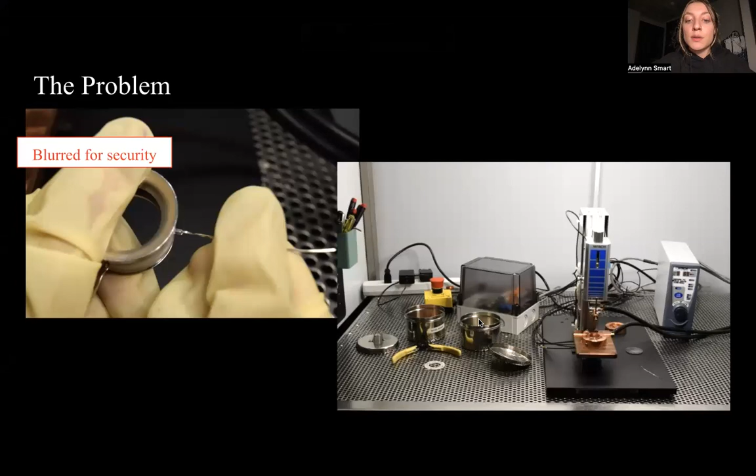Operators working on the body component of these tubes are currently required to use a type of pen to make spot welds. The exterior of the body includes 3 metal tabs where the welds take place. Both the tabs and the nickel ribbons that are welded to the tabs are only a few millimeters thick, as shown here. Using the current weld apparatus, operators must make up to 9 welds per body, leading to excessive ergonomic strain as they perform the precise, repetitive hand motions.

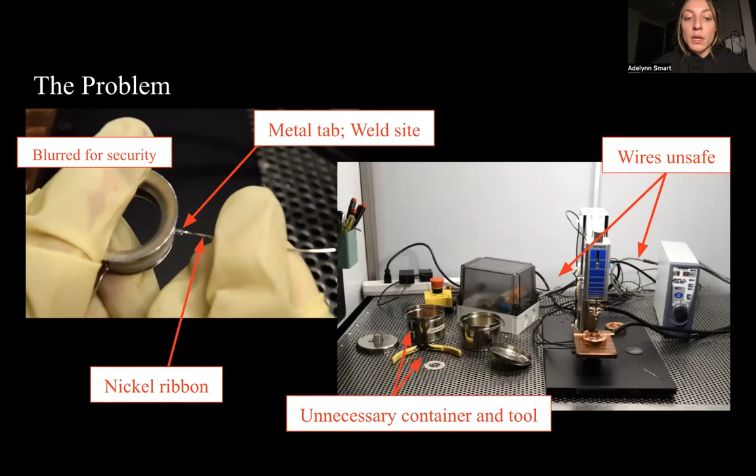In addition, welding done by hand can cause unwanted material to splatter onto the tube, so operators must add a shield before making welds. Finally, the workbench was disorganized and contained non-value-added elements. A new semi-automated weld head was introduced to the area. With the new equipment, operators have to simply press a foot pedal and the machine will make the weld for them, decreasing ergonomic stress and eliminating the need for a shield.

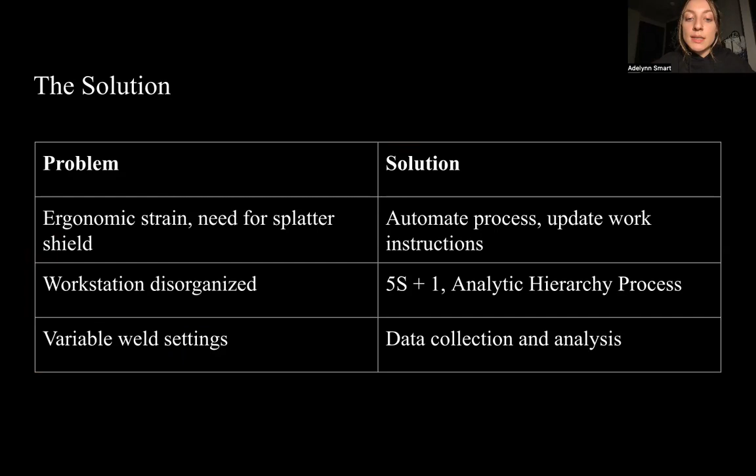For the workstation layout, I utilized the analytic hierarchy process and gathered statistical evidence to support a decision. I considered 4 layout options. The criteria selected were process lead time, wire management, safety, welfare, social concerns, and environmental concerns. After assessing each option with this criteria, statistical evidence pointed to option 4 being the most optimal choice.

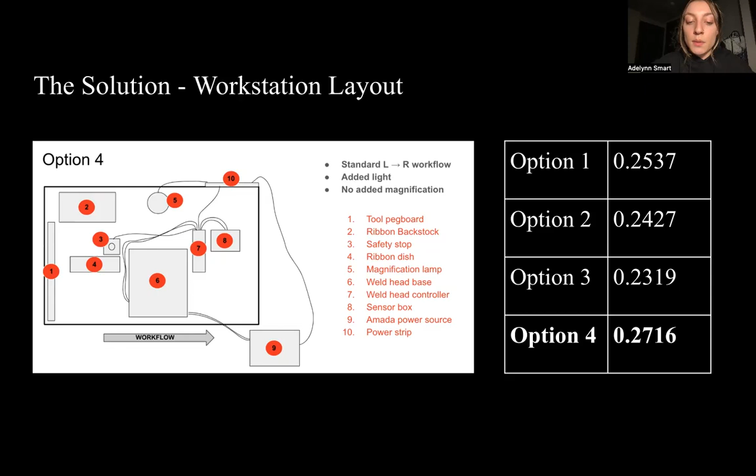Finally, there are 9 variables on the welding equipment that can be adjusted to produce various types of welds. The best combination of these parameters, or the most optimal weld recipe, had to be determined through experimentation. My colleagues began testing this past spring and settled on a recipe, but revisiting that recipe this fall revealed new issues with sticking and sparking. I conducted new rounds of testing this fall, focusing specifically on minimizing these issues.

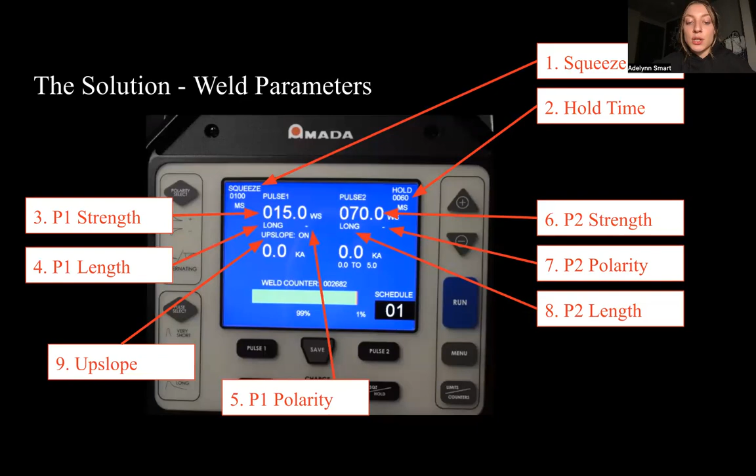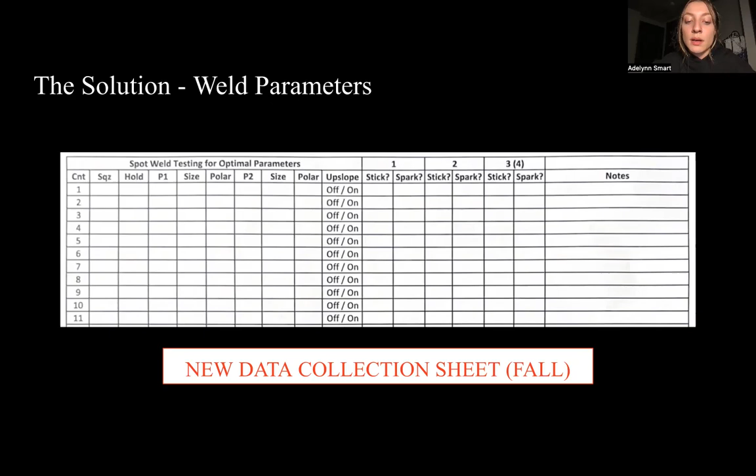I created a new data collection sheet with much greater detail, and then I spent weeks manually isolating each of the variables to understand how each one affected the quality of the weld. I input this testing data into Excel and created a system to rank the quality of each weld experiment. Finally, I added all the data and rankings into Minitab to generate interval plots for each of the 9 variables.

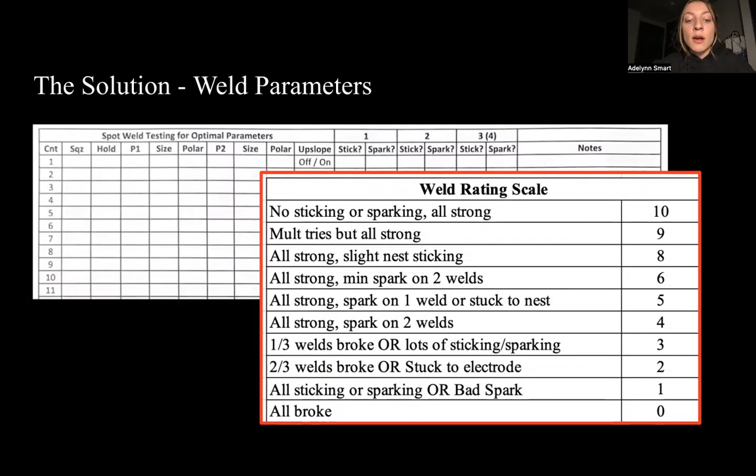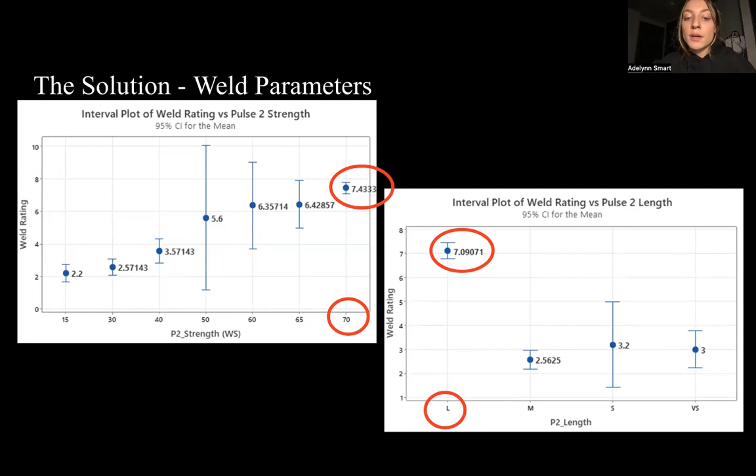These are 2 of the 9 interval plots generated in Minitab. These plots revealed the setting that produced the highest quality weld for each variable, and therefore determined the new optimal weld recipe. Comparing the fall and spring recipes demonstrates a significant improvement in quality.

Even with complications, I have accomplished the main goals I set for myself with this project. I experienced setbacks with the hardware malfunctioning and having difficulty keeping team members on the same page at times, yet I was able to mitigate and learn from these risks and still provide completed deliverables. If I were to expand on this project, I would collect additional data for determining the optimal weld parameters.